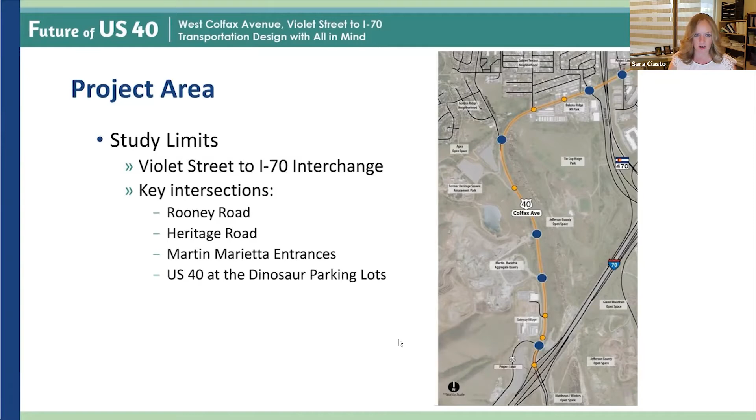We're going to keep on moving here and talk about some corridor challenges. Before we start talking about what we're going to do, it's important to understand where we're at. This corridor is an interesting mix: it's a recreational corridor, it serves residential areas, and it's also serving industrial and commercial uses. It has multiple destinations and a very interesting mix and varied types of users that use the corridor. There's a lot of things for us to be looking at as we start talking about what US 40 looks like as we keep moving.

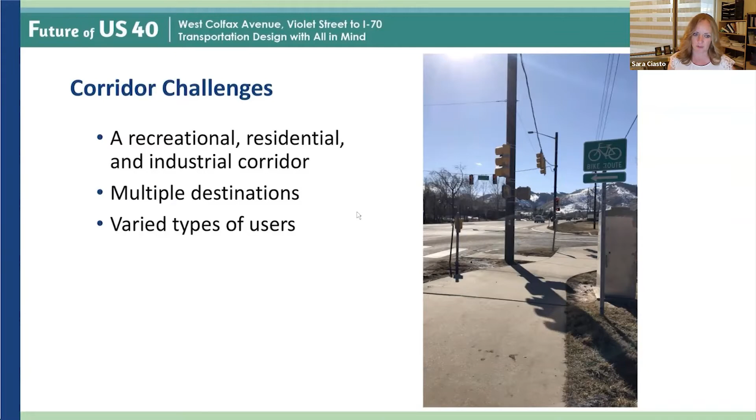So what are we going to do? That's all great, but what are we actually going to tackle here in the US 40 project? We're looking at existing and forecasted conditions. We're just trying to ground what is going on out there right now and what are the plans for what's going to happen on the corridor and around the corridor in the future.

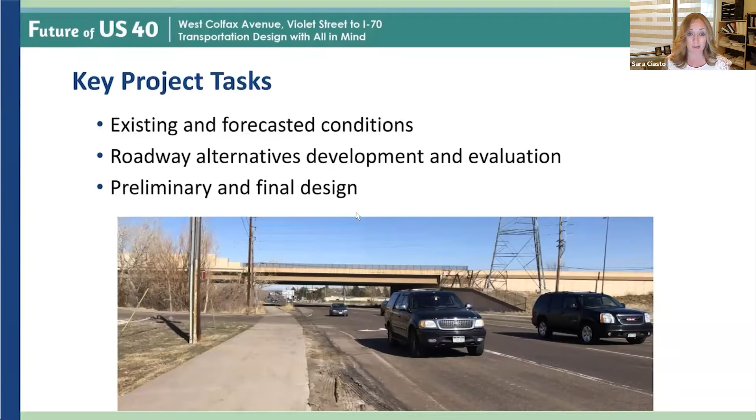We are going to take a look at roadway alternatives, both the development of those alternatives and the evaluation, really with the focus on providing improved multimodal connections along this corridor. Then as we get through the alternatives process, we'll take those into preliminary and final design and really build them into a project that we can go support you all and the city in getting constructed.

What's going to be really important in all of these efforts is this ongoing conversation, starting with the conversation we're having tonight, starting with some of those comments we're seeing on the idea wall on Guiding Golden. We want to make sure we're having this discussion with you as we go along, and that starts with these community values. We started our whole process and our whole thought around this Golden Vision for 2030. We want to build from these values, and these values actually provide a really awesome connection to the kinds of things that we want to do on this US 40 corridor.

We're also going to start by looking at things you all have been a part of pretty recently, namely the South Golden Neighborhood Plan. We've been talking about a lot of previous planning efforts as background information feeding into what we're going to do here with US 40. This plan, particularly because it was just late last year that the city came to you with some initial conversations about this, part of that was generating these lists that you see here. This one is for Violet to Zeta, and this general list of desired improvements that you all told the city you were interested in.

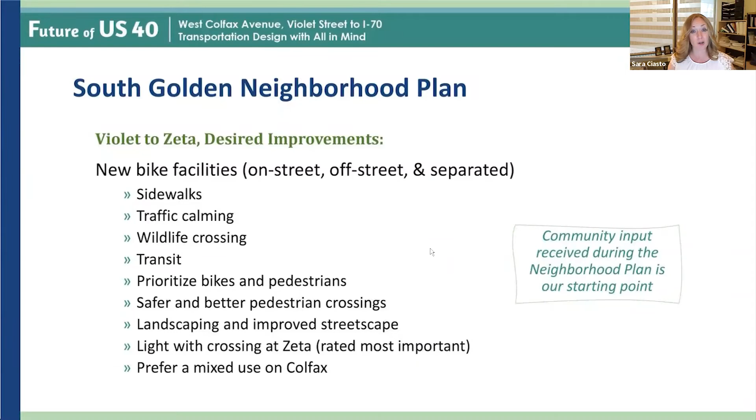So while we assume that most of you have a pretty good understanding of the project area, I wanted to just kind of zip quickly through a summary of the existing conditions data that we've been working on gathering to really inform this alternatives and then the design process.

So we're going to start with the geography. You all know this, right? The corridor is partially located behind the hogback. You've got the next range of the foothill peaks, moving up to the west. This is obviously a City of Golden project, but US 40 is also under CDOT jurisdiction. We also have Jefferson County open space in the area as well. So there's a coordination effort here for several agencies as we start the conversation about what makes sense down here.

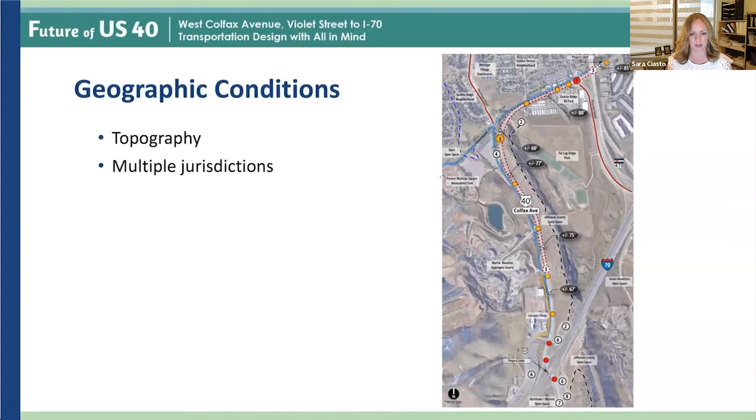Keep trucking, Hannah, if you don't mind. Again, you all know this, but the corridor serves as a connection to several major transportation facilities, right? We're talking about connections to I-70, to 470, to 6th Avenue, to Highway 93. The access, we saw it in your comments just now. We've seen it in the comments on the idea wall. We've seen it and heard it in everybody we've talked to so far on this project about the access to the open space, the access to the recreational destinations. We see kind of differing peaks sometimes in the traffic related to those sorts of things, but it's definitely providing a connection to really valuable community elements. And certainly then obviously serves local trips as well for the neighborhoods and other things.

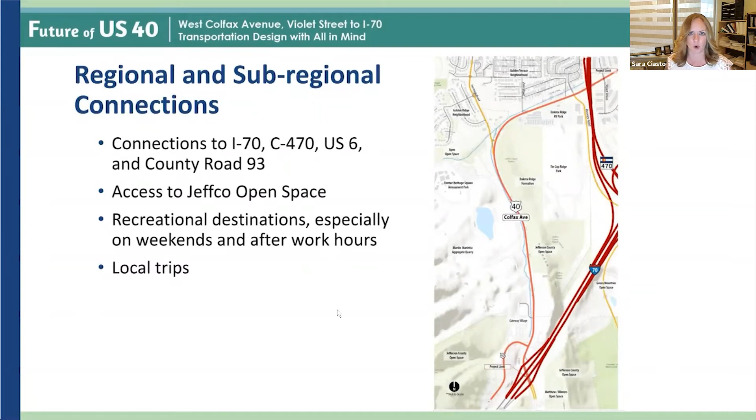The land use, I alluded to this a little bit earlier, but there's just a grand variety of land use along the corridor. We've talked about this, residential, commercial, industrial, kind of all present in addition to the recreational. There's this vision that's been developed out of the South Golden Plan, but there's also planned redevelopment coming, and you all have alluded to that in your comments as well. Most of those are driven by recreational opportunities, but it's good to just kind of, for us as the background, to know that this is all going on.

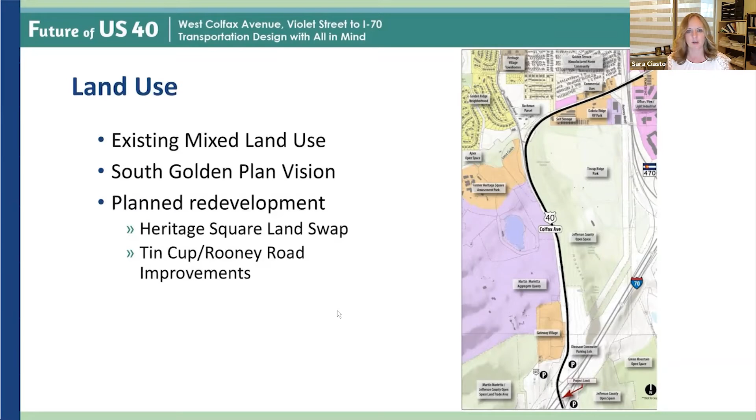Moving on to the next slide, we've got more obvious but good to note content. Some context here that we see a really incredibly diverse mix of users and modes. Your comments also alluded to that. We're seeing cyclists of a variety of levels.

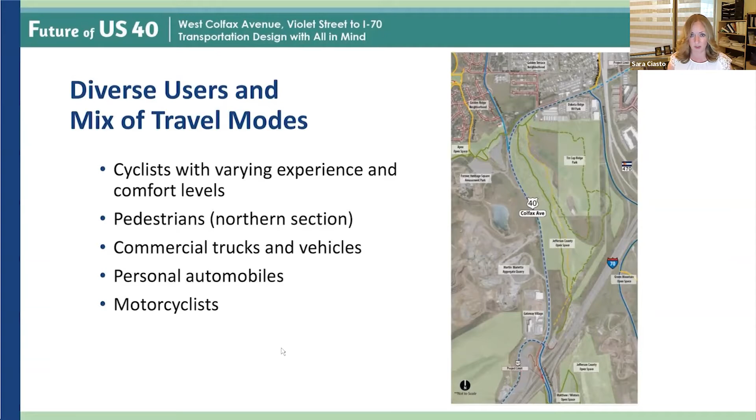Pedestrians, obviously not so much down on the western or southern piece, but more up in the northern or eastern section. Commercial trucks and vehicles, that freight operation in and out of Martin Marietta, is something we need to be talking about. Personal automobiles, motorcycles - it's just getting used by a lot of different types of users.

As with most transportation projects, we also have to dive a little more deeply into the vehicular traffic. We need to understand what's going on with the cars on the road. So this is a whole bunch of data, and it will all be available. That graphic's a little small, but you'll be able to zoom into it when you see it on Guiding Golden. I'll walk you through the basics here.

We completed traffic counts back in May. What was interesting is that data was pretty consistent with pre-pandemic levels. We're seeing this rebound in vehicular traffic. The weekday volumes were higher than weekend volumes - that was something we wanted to look at. We didn't know if recreational use would drive a higher volume on the weekends or keep the standard weekday peak. Between 5 to 20% higher is what we're seeing on weekdays as opposed to weekends.

It's obvious, but it's good to document that we're seeing much higher truck volumes from the Martin Marietta access points to the south. It's pretty obvious, but it's good to know what we're looking at.

We're also looking at taking that existing data and finalizing it into the 2050 forecasts. What those forecasts are showing out of the regional models is that the forecasted future traffic shows relatively low growth - in fact remarkably lower than what we'd see across the region. It's notable, showing less growth along US 40 than elsewhere. What it results in is about 10,000 vehicles a day, if anybody's really into the numbers.

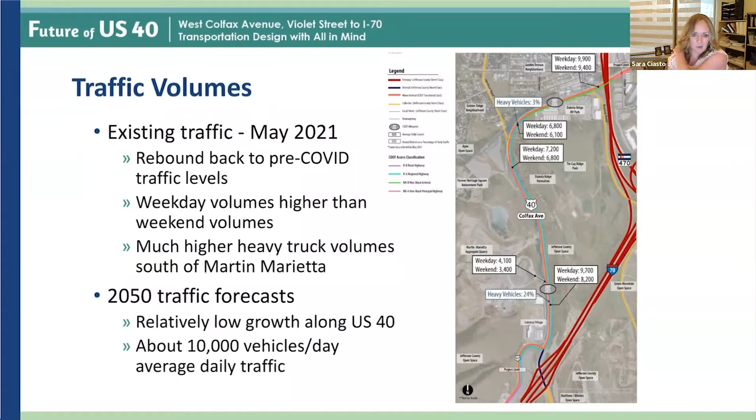So no matter what we do, we always have to keep safety in front of it. I love that we were seeing some of that response in your targets for this as well. Again, lots of data on this slide, information that will be available that you can go in and zoom in to take a peek at.

What we are seeing is more significant crash patterns in that northern to eastern half of the corridor than in the southern part. You can see here 80 total crashes, most common are rear end and broadside. We do have a handful of fatals in the last 5 years, so we're looking at the details of how that happened. Notably, we did not identify a trend in the available crash data, from both Jefferson County and CDOT, related to crashes from truck traffic. They thought that was worth noting, so it wasn't something where we were seeing a significant trend around trucks and heavy vehicle traffic driving crash instances.

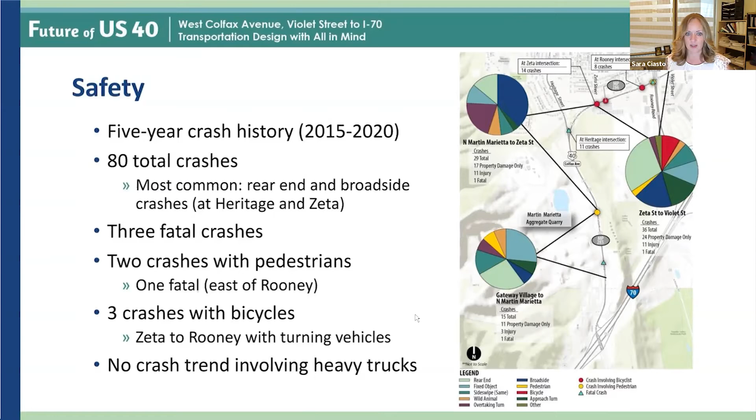So it's a whole bunch of existing information - what are we going to do with all of that? For us, to organize our approach, we've taken the corridor we've shown you and broken it into 3 segments, and you can see those here. The limits are less important, it's just being able to see how we've looked at this.

One is from Violet to Zeta, through that more urbanized section that exists right now. The next one runs from Zeta around the corner at Heritage down to the northern entry point, before you get to the access locations for Martin Marietta. And then we picked up that 3rd segment and ran it through the more freight-focused area, where we see the bigger freight numbers, from the Martin Marietta accesses down to the southern project limit at I-70.

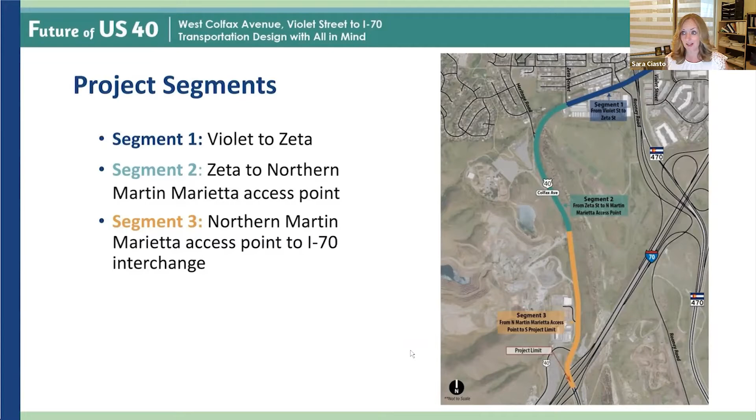From here, as Leah alluded to earlier, Hannah's going to jump in and walk through a process around some of the preliminary ideas we've generated. This is where your involvement is going to come back in terms of Menti. So if you put your phone aside, you might want to pick that back up, and I'll let Hannah dive in.

You're welcome to take notes if you want, but I'll remind you of the elements we have up on the screen that we want you to choose your preference for, so you don't have to memorize everything. I'll be explaining them maybe in more detail than some of you need, but bear with me, because I really want everyone to understand these elements as much as possible, so that when we ask for your preferences, you'll be able to give us an informed decision.

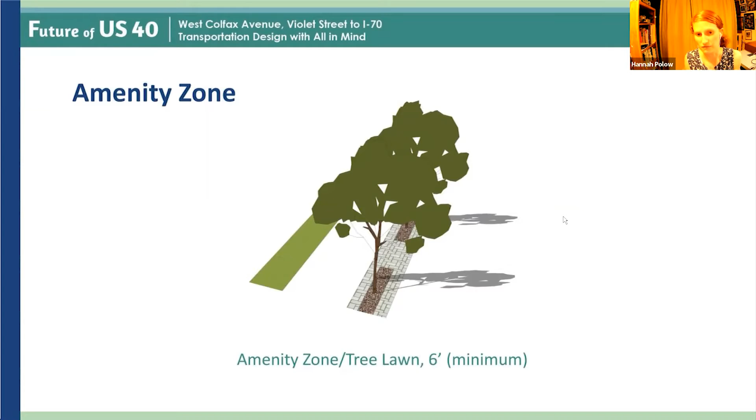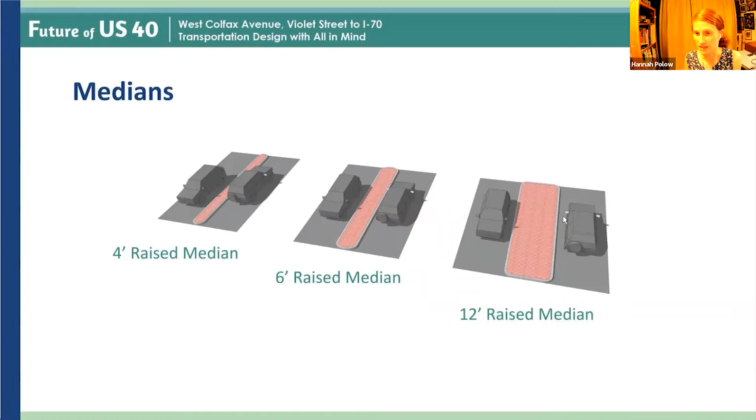Medians can have a number of widths. The 4 to 6 foot medians really don't provide a pedestrian refuge, a place for pedestrians and bicyclists to wait in the middle of the intersection, whereas the 12-foot raised median really does create a comfortable space to wait in the middle of an intersection. This can be really effective at unsignalized crossings or mid-block crossings, and that can create an important crossing that maybe isn't there today. One thing about raised medians is it can change access. Obviously, making left turns should not really happen with raised medians, so it does affect and change the access point.

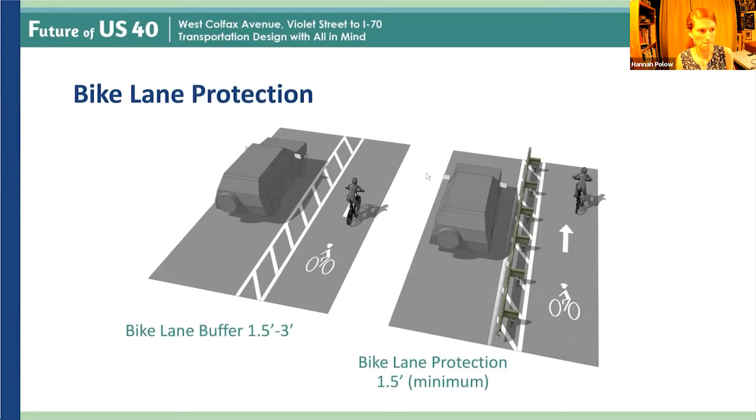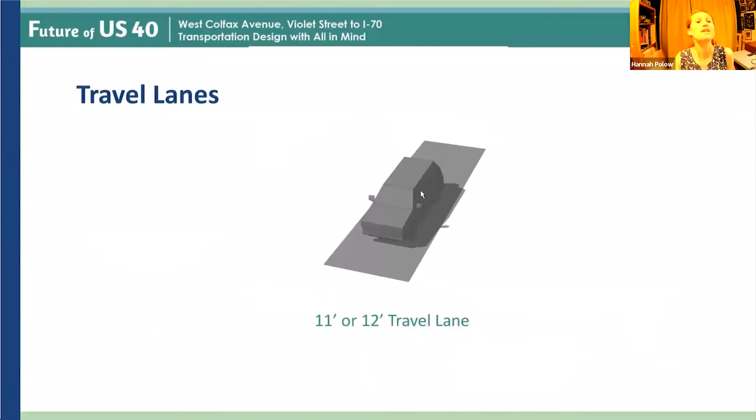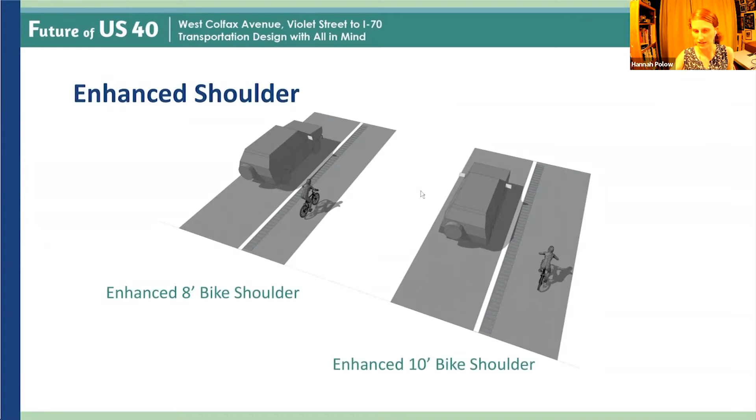And then multi-use path, which is not on the list for this one. Is that right, Leah? I think I'm... Can you go back to the shared one, the first one, because that was... Oh yes, his shoulder, thanks. Shared lane, yep, I missed these, sorry Claire, who asked the question. So this is enhanced shoulder, a wider shoulder with that defined edge line and rumble strips.

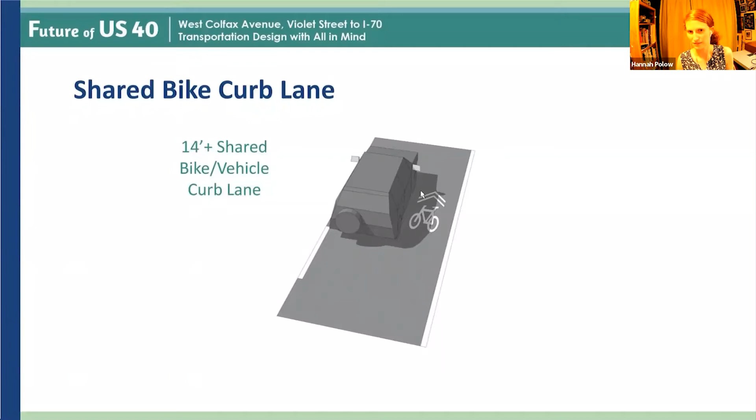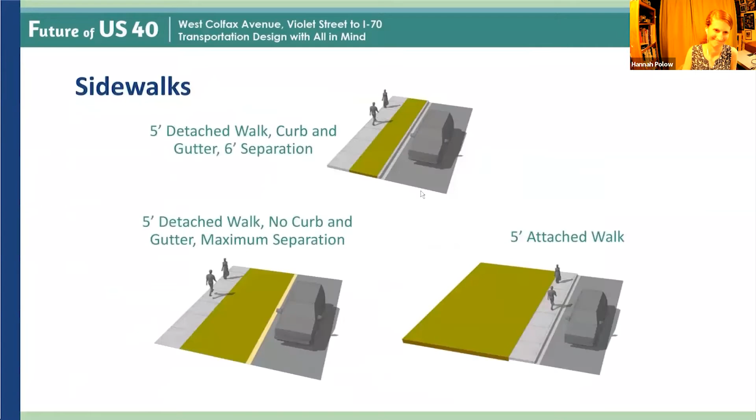And a shared bike curb lane with that shared space between bicyclists and vehicles. Cool, and I'll just kind of go slowly through them for anyone else. Travel lane. Right now we are just talking about bicyclists. The next question is about pedestrians, where we'll ask your preference there too.

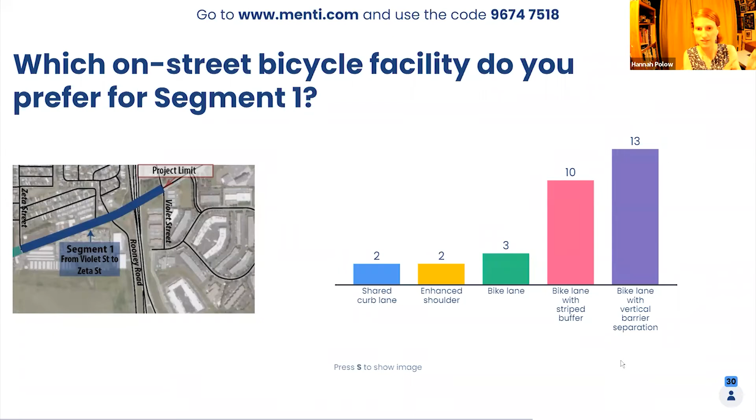I think we'll continue on, but you're still able to vote once I move on. This is similar to the previous question we did, so you'll still be able to vote even though I move on. But there's a clear preference for a bike lane with some kind of separation from travel lanes, either with a striped buffer or with a vertical barrier.

Now we're going to ask your preference for pedestrian accommodations, and this is where we have the question about the multi-use path. Again, you can only vote once, but if you're having trouble, like Leah mentioned, you can enter it into the Zoom chat and we'll be able to register your vote there. I'm going to go back just for a second to show the multi-use path options.

So these are the multi-use path options, with that lower right concept being the most robust option to separate bicyclists from pedestrians.

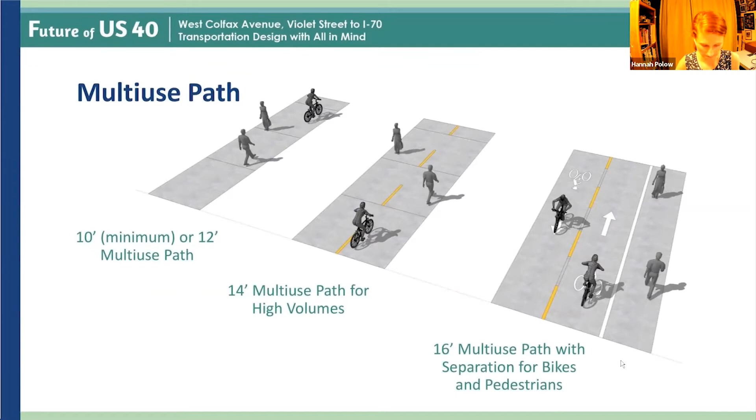Okay, we've got a couple questions. Sure, we might as well answer while people are voting. As far as the amenity of separation, that's something we're not getting votes on, because if there is room and we would have space for that, we assume that would be preferred.

And why won't vertical separation get scraped off by snowplows? Hannah or Sarah, maybe that's something you guys have experience with. Depends on the type — vertical separation definitely introduces some challenges around maintenance, since you're plowing against it and/or plowing behind it. So that's definitely a consideration in terms of long-term maintenance for the city and other things. There are facilities and types of separation and barrier that can get down without getting beat up and taken off by plows, but it adds cost, it adds width, it adds all those things. So those are part of the trade-offs we'll be talking about as we get through this.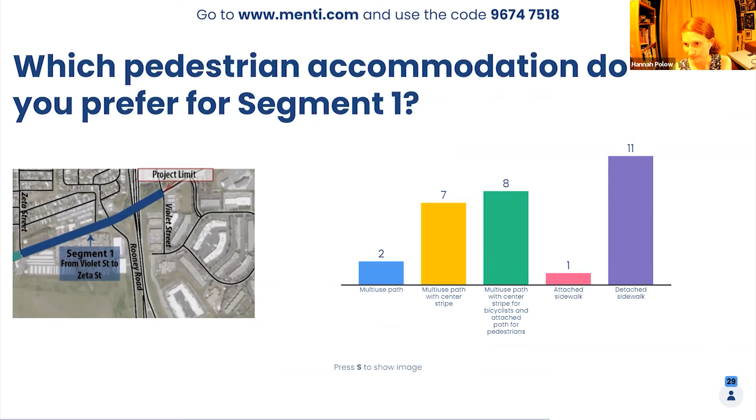There's also a question of whether the detached sidewalk includes a bike lane. For this purpose, we're keeping those two things separate. That's part of what we'll do next after this meeting — packaging these individual project elements into alternatives and full cross sections. So that hasn't been determined yet, but for this question, we're just focusing specifically on pedestrian accommodations — which of these options would you prefer. Later we'll talk about combining or how we accommodate both bikes and peds.

Thanks, Leah. I'm trying to look at the chat too, so yes, I appreciate you. Yeah, no problem.

Building off that, there are some good comments coming in on the chat about this that are things we'll consider as we're moving forward. But I think we could go to the next question.

Great, okay, so we're still on segment 1. I think we'll be able to go faster on the other segments. We'll have the same questions for the next segments, so be thinking about what your vote is going to be.

So which of the following options would increase your comfort and safety while crossing the roadway? There's only 2 options here: a raised median without the pedestrian refuge, or a wider raised median with pedestrian refuge to allow people to cross in 2 phases. This is really thinking about whether you'd prefer to cross the street all at once, or whether you'd prefer there to be a space to potentially wait if you're not able to get across the intersection all at once.

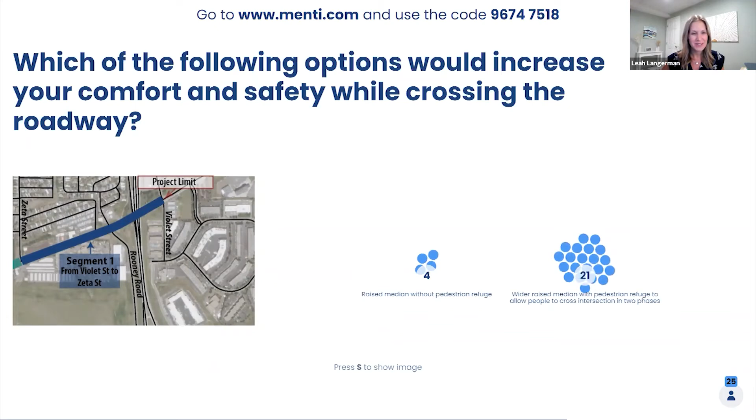Yeah, we're pretty early in the process still, so it's hard to answer some of the questions. I know it's easy to jump to trying to think about how this will all look in the end, but we're not quite there yet.

And that's one of the reasons we have our concepts pretty conceptual, and we don't necessarily have them located in the place in the segments, because, like Leah was saying, we're just not there yet. So we're really thinking about them in the idea phase, as opposed to actually locating them.

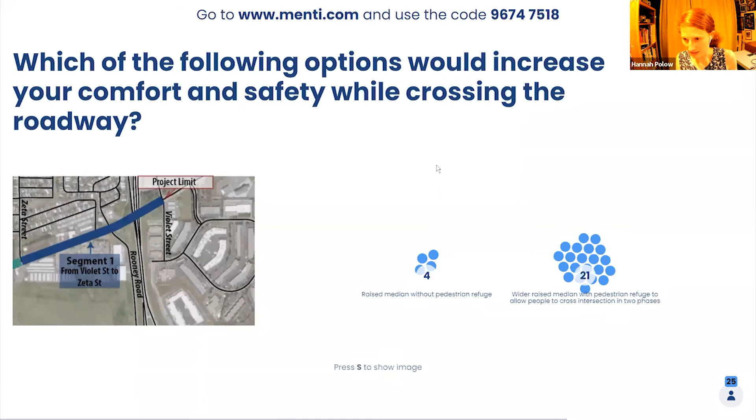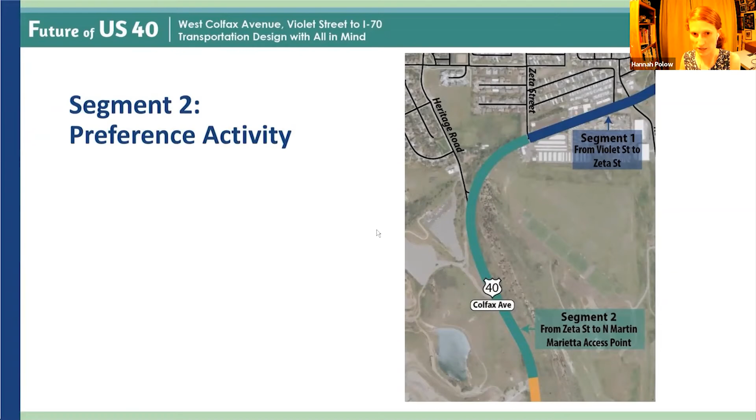Okay, looks like we've slowed down a little bit in the voting. So now we're going to go into segment 2. So now we're thinking about between Zeta and that northern Martin Marietta access point. Same questions, one vote allowed.

The first question here is the bicycle facility, and the next question will be the pedestrian preference. Let me know in the chat box if you want me to go back and refresh your memory.

But that shared curb lane is really that shared space between vehicles and bicyclists, and that enhanced shoulder actually has a designated space for bicyclists that's separate from the vehicles. The bike lane is similar to what's on Washington Street, a separated space from the vehicles, similar to the enhanced shoulder. And then there's a bike lane with a striped buffer, so those 2 lines with hatching, and the bike lane with a vertical separation.

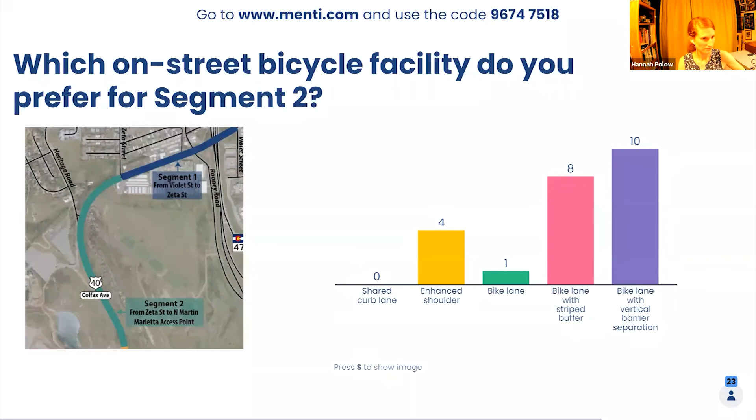So a couple more comments and questions have come in. Someone's wondering if this would be in both directions.

Great question, and something we're considering - it is not determined yet. Really, it's going to come down to the connectivity, the preference and options, and as with everything, we need to figure out how much improvement the project budget can buy. And so we're going to have to take a look at a lot of these trade-offs and conversations around what's going to provide the best benefit for some of these improvements, and work that into the discussion.

So it's very much an evolving discussion around whether we'd put it on both sides, or just put it on one. Do we put bikes on both sides, but then just a pedestrian facility on one or the other? All kinds of things that we're exploring.

Really the intent of today, as we've alluded to, is figuring out what's going to feel most comfortable for you all out there as users. And then we'll start figuring out how to blend that with the connections and the budget, of course - a little reality check, to see how we're going to be able to package these in a way that really provides the best bang for the buck.

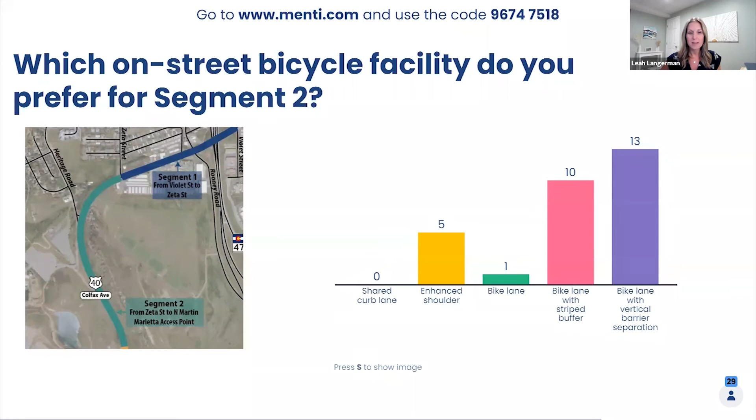Should I move on, Leah, or do we have more questions? I think you could move on to the next one. Okay, and then we'll keep answering questions as they come.

Okay, great. So similar to the first segment, we have a question about pedestrian accommodation. So what would be your preferred pedestrian facility within segment 2? That's from Zeta to the northern Martin Marietta access point. So we've got the three different multi-use path options, the detached sidewalk, which is separated just a little bit from the travel lane, and the attached sidewalk, which is immediately next to travel lanes.

Okay, so similar to what we were seeing before, kind of a preference for detached or multi-use path, whatever the variation is.

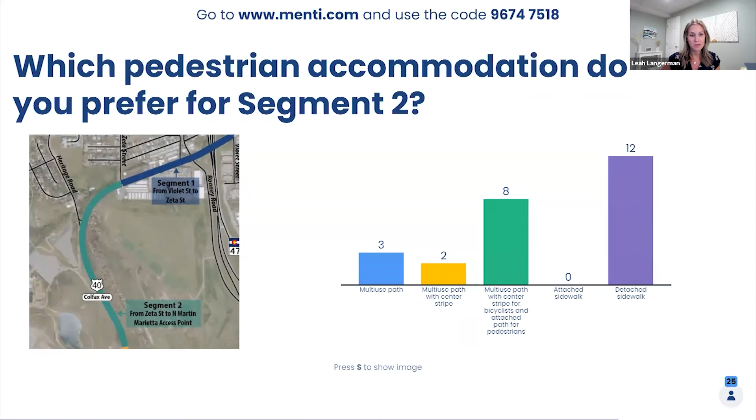And David, that was a good comment about how this section has a lot of families, a lot of people that would be using this, that we really need to think about keeping safety in mind. That's a really good point. It's something that maybe we didn't touch on enough in the early part of the presentation, but it's something we as an internal team and with the city have talked about a lot. We've all seen the road bikers out there who are comfortable in a different kind of situation. I would not take my kids on their bikes out there. So how do we mix and match parts to provide better opportunities for users of a whole bunch of different levels of comfort, acknowledging that this is an area where we may draw in families and other folks who wouldn't be as comfortable, and we'd want to look for opportunities to enhance that safety as much as possible. So that's definitely on our minds. Appreciate the reminder of that.

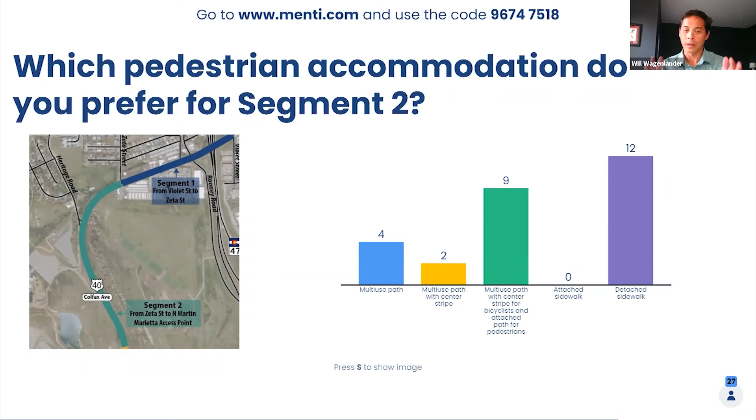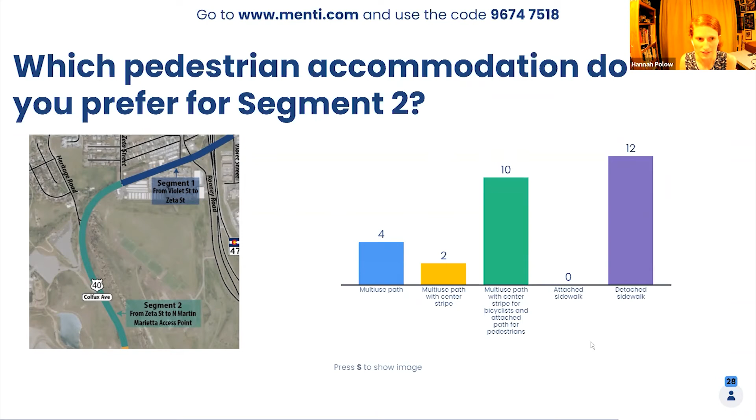Okay, so looks like we've kind of leveled off in our voting, so I'm going to move on, and we'll continue to answer questions as we go on to our last segment here. Same questions.

Which on-street bicycle facility do you prefer for segment 3? Again, these are the same options that are available. Thanks for your patience and making sure we can get as many votes as possible. So looks like, yeah, we've got our bike lanes off to a strong start here.

Hannah, I'm just jumping in real quick here. One thing to consider that we did notice during our observations out here, and this is a known quantity obviously, is that this is a major transition point for some of those expert cyclists going up US 40. So that's something you'll want to consider when you're thinking about what treatment you'd like here.

And of course, the large gravel trucks. Yeah, I think when we were out there, we were out there for two hours, and I think we saw them like over ten times. It was something, it was often, multiple times. And during our site visit, we did hear from a family that would like to have some better connections from South Golden to Gateway Village here and the amenities that are being built. So that's another thing I just wanted to pass along.

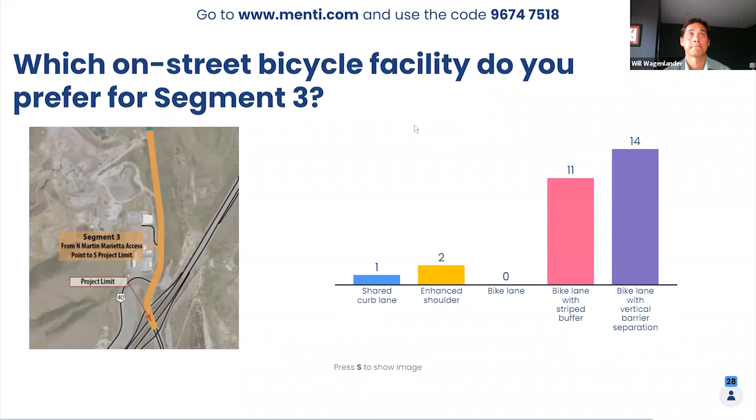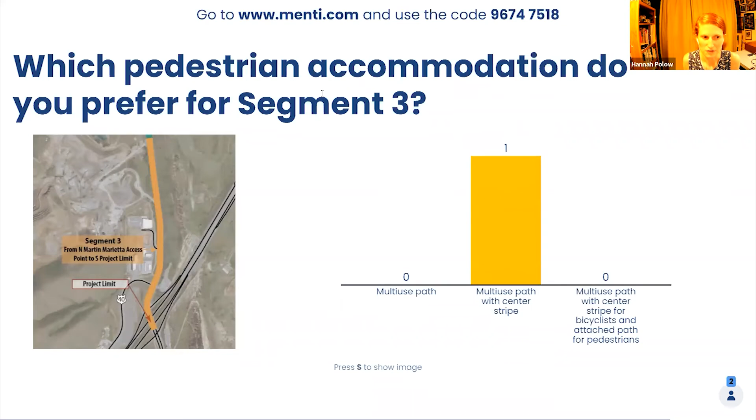Okay, looks like again we're kind of leveling off with our voting, so I'm going to go to our last question, related to your preference with pedestrian accommodations for segment 3. This is from the northern Martin Marietta access to our southern project limits, which is the interchange with I-70. So you might have noticed the sidewalk options are not here. For this segment, we're really considering multi-use path as the pedestrian accommodation.

And Jeremy brings up a good point. Just over the Hogback, the Tin Cup Ridge redevelopment is underway, and they're in conceptual design right now. There is an idea of doing another concrete path on the east side of the Hogback there. So you can think of this as not just one facility along a road, but maybe a system that suits a number of folks in the future. As we move forward into developing a preferred alternative, we're going to take that into account and make sure we're communicating with them to create a complete system.

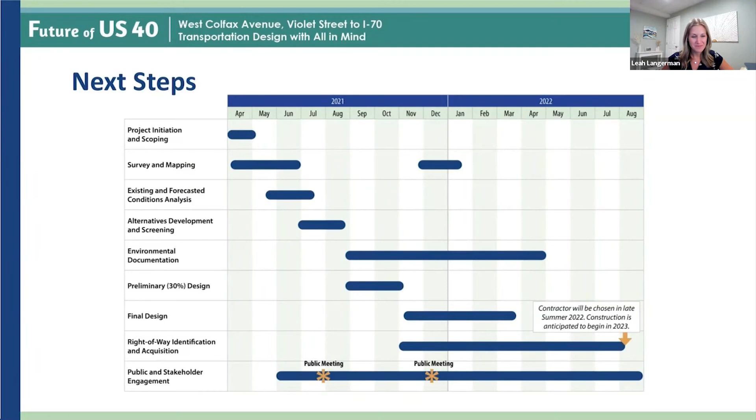So I'll dive in and take us through a little bit of conversation around our next steps. We'll do a quick wrap up, and then we're going to open it up and just have a conversation. So we're almost done talking at you, I promise.

Project schedule is shown here. You can see we're in this kind of late July area with this public meeting. What's important, to reiterate, is that the input you've provided and will provide tonight and over the next couple of weeks as you think of things is really going to help us immensely as we work through establishing the criteria against which we'll evaluate the alternatives. As we build those alternatives into designs and move them forward into construction, it's critical for us to hear what's important to you and your preferences.

You heard us talk a little about this in the dialogue we've had over the last few minutes, but I think it's really important to recognize the trade-offs that come with some of these things. A trend we noticed in the way the votes were going is obvious, right? Anything that's wider and provides more space immediately feels safer. More separation, more width, feels like you have more room to move, especially in a recreation environment where you want that space to feel like you're really getting to enjoy it. The wider options, though, do mean additional trade-offs.

Some sort of separated facilities — if we backtrack to segment 1, that area from Violet down to Zeta, when you think about separated facilities there where we have more accesses, property access and business access, a separated bike facility or something with a barrier is going to be a challenge around making sure we're accommodating those access points. So there's these balanced conversations and trade-offs we need to discuss as we get into this stuff. All of that is coming.

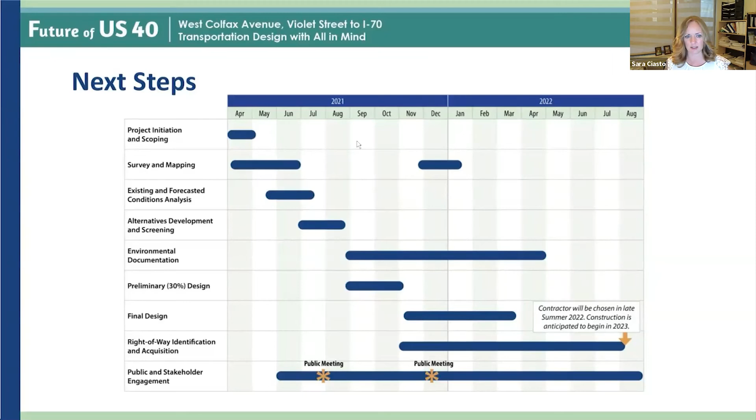So from here, we're going to stop talking a little bit other than to respond to you and open up the discussion. I think Leah's going to facilitate us through that. So appreciate y'all being with us tonight.

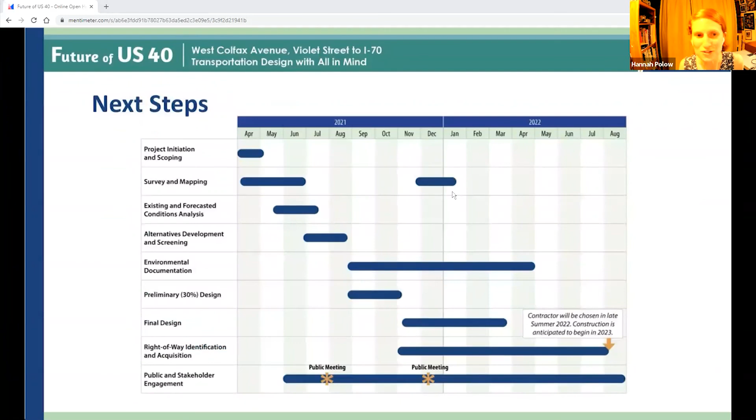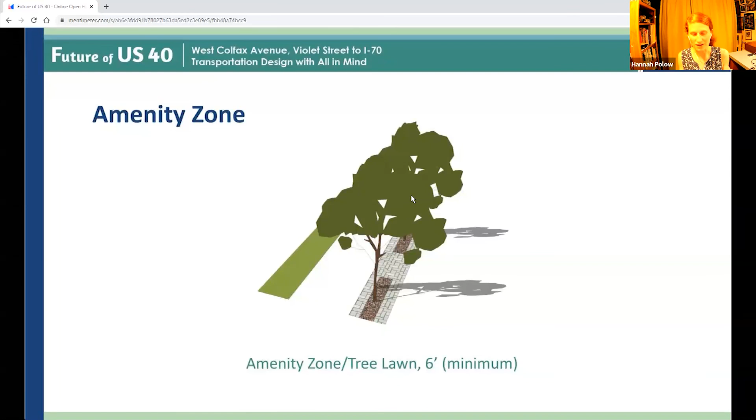Yes, is the short answer. I'm going to try going back. The amenity zone is what you're thinking, right? Is that what you were thinking? Yes. So this is something we didn't necessarily ask people's preferences on, because we're assuming if there is space, there would be a preference to have this, and we would add it as part of the cross section.

Okay, cool, thanks so much. And then, I don't want to open up a can of worms because I'm sure this is way down the line, but as somebody who just moved from Denver and was walkable to coffee shops and stuff, I love the idea of Launch Coffee and all the stuff that opened past the mine. I know a lot of us drive over there, so I love that these bike paths will open up access to what's already developed.

I don't know who you would compare what you want this area to look like. Some places, like Stapleton, do a really good job mixing industrial, restaurant, and pedestrian uses. I didn't know if that's way down the line, or if you guys have a vision, or any areas you'd compare this to.

I'd pitch that maybe to Rick or Corey. The South Golden Neighborhood Plan is in process right now, and the Tin Cup Ridge project will be coordinating with them. Part of the outcomes is a future vision of mixed use along this corridor with industrial and employment behind it. So that's in process now, and maybe Corey or Rick could fill in more detail.

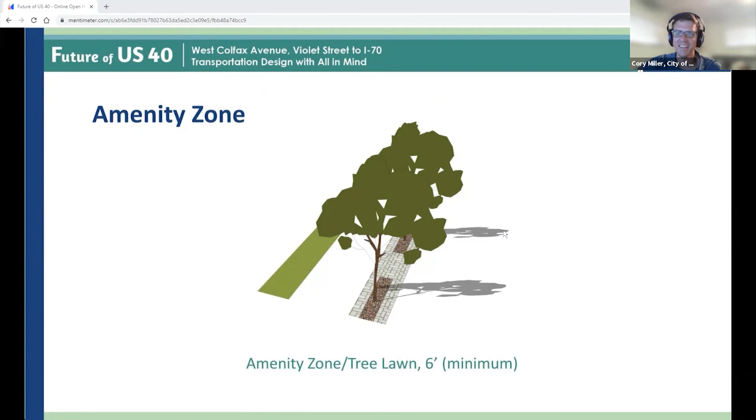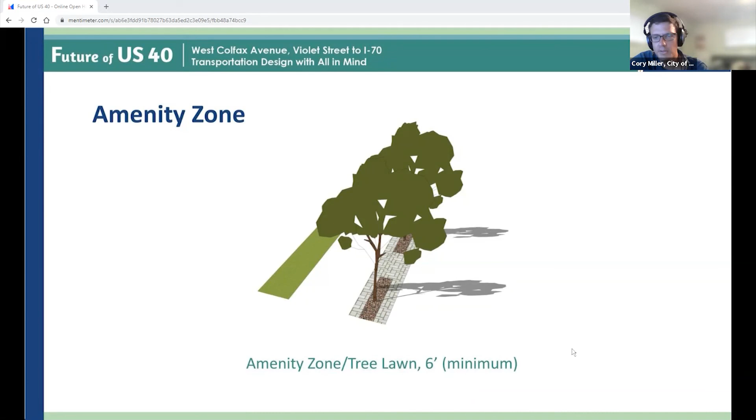We did start a South Golden Neighborhood Plan effort last year, and we put together a sub-area component of that plan focused on this corridor and also the Heritage Square parcel. We took some initial feedback on what types of land uses the community would prefer along the corridor, and we got some initial feedback on that.

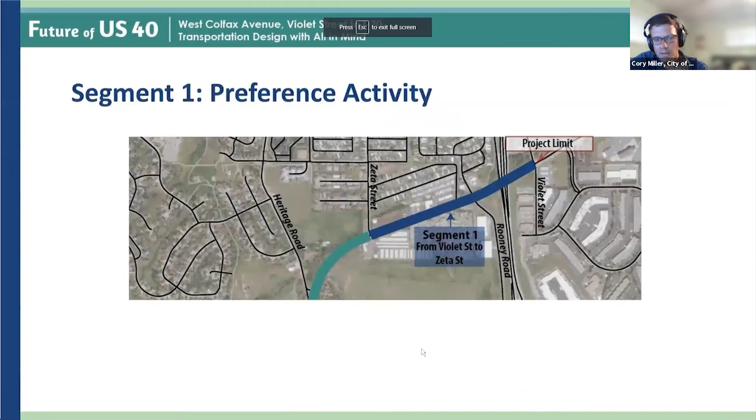That's what Will was alluding to. We're going to pick that process up again, probably next year, once we get the transportation element squared away, which is largely what David Evans and Associates is helping us with. So look for more of that soon. We got some initial ideas about the broad stroke of what people would like to see along the corridor, but we'll refine that and come back to the community. So as a long-winded answer, that is further down the road, but it is still coming.

Maybe just to answer the question about what future developments are coming: we don't have any developments in the queue, just in the broad sense that we know development will happen and we're planning for what those uses would be. The only one we know will redevelop in the near-term, in the next 5 years or so, would be Heritage Square, because it's looking for a new use at some point, and the city would be actively engaged in planning with the owner.

Yeah, and this project alone will help drive more development in the area, because there'll be a lot more access to those types of businesses. Right, that often happens with these kinds of investments, for sure.